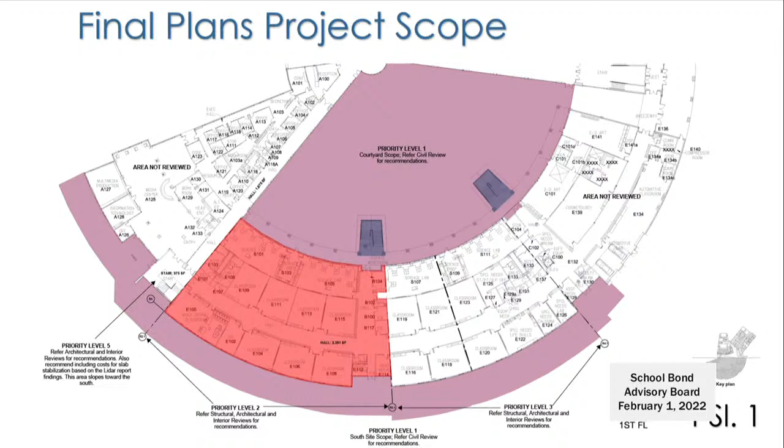The site in question is Douglass High School, which is at Martin Luther King and Northeast 10th Street. It's the south side of the school that we were having some issues with. The area in the pink color, and the purple area, are the areas we're going to be working on this coming summer.

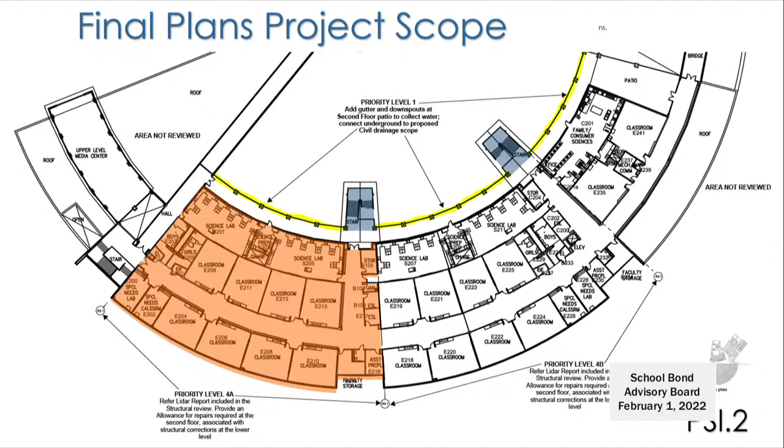The brown area now is phase one, and that's where we have the most extensive amount of settling and heaving in the slab. We have a little bit over in the part to the right. So what we're going to do is we went and did a Lidar study, where they come in with a laser and do digital measuring throughout the whole area — the floors, walls, everything — and you see the different contour lines are the different elevation changes throughout that area.

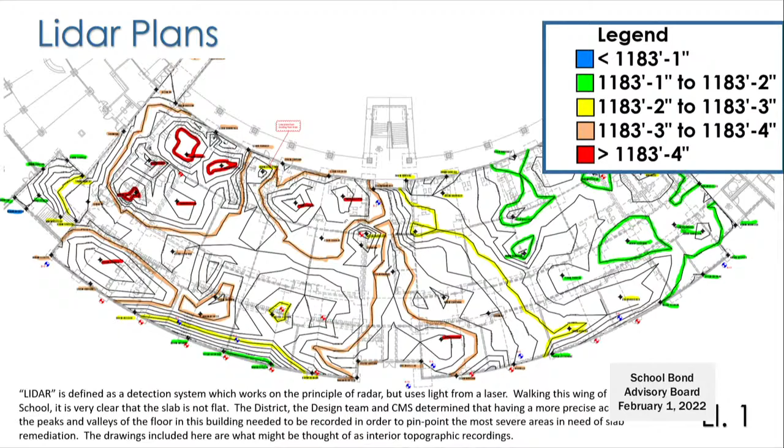This area here where the lines are real close to each other, that's where you see quite a difference of elevation in the floor. So where the green mark at the bottom is, is basically where the grade should have been. But see how the lines go up? The slab is actually heaving up at that point. So we're going to come back in — that's the second floor, with a little bit of difference in it, but not nearly like the first floor.

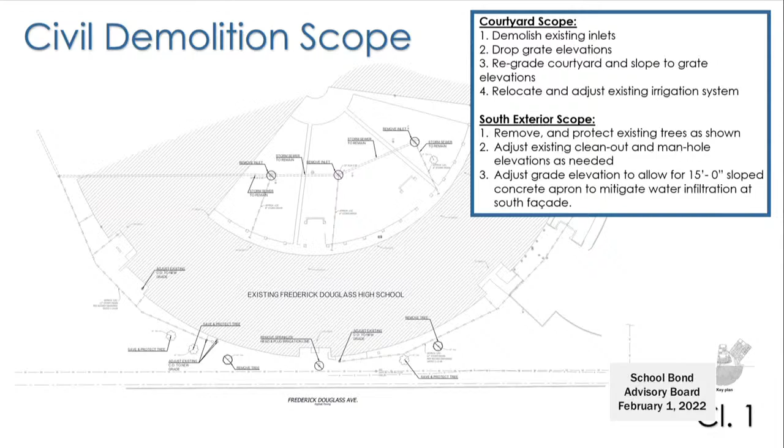So what we're going to do is demo out some trees on this south side, come into the courtyard and do some regrading, remove some inlets that we feel like are too small, and resize those up. Down here at the bottom, all the squares around the bottom part and the inner part of the courtyard is new concrete. So we're going to pour a 15-foot band of concrete around the whole south side of the school, and do a 10-foot band on the inside.

Engineers feel that the soil underneath the school originally was a real expansive clay. They dug out 4 feet of that soil when they built the school and came back with select fill that shouldn't expand as much. But their feeling is that moisture from outside rains is getting in, migrating underneath, and hitting that expansive clay deep down, pushing back up.

The outside walls aren't really pushing because there's so much weight on them. The corridor walls in the middle also carry a lot of weight. But right in the middle of that slab area, it's just 4 inches of concrete, so it's found the path of least resistance and is pushing back up.

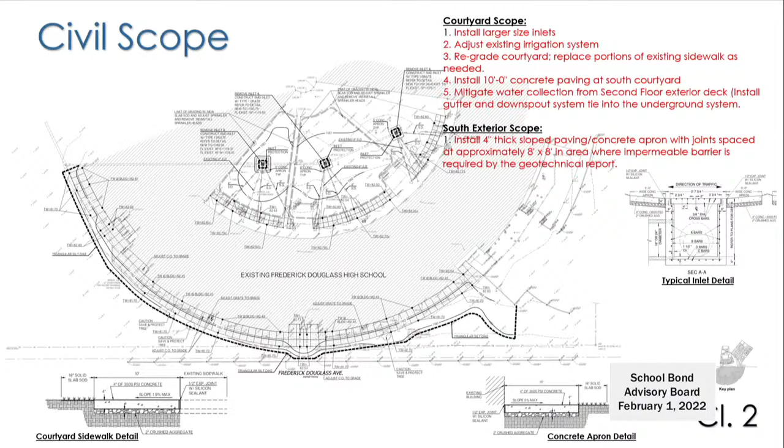So we're going to go inside the school and drill holes and do injections in the slab. We're also going to go around the outside perimeter and put in steel rods, driving them down into harder soil to hold and pull up on the outside foundation.

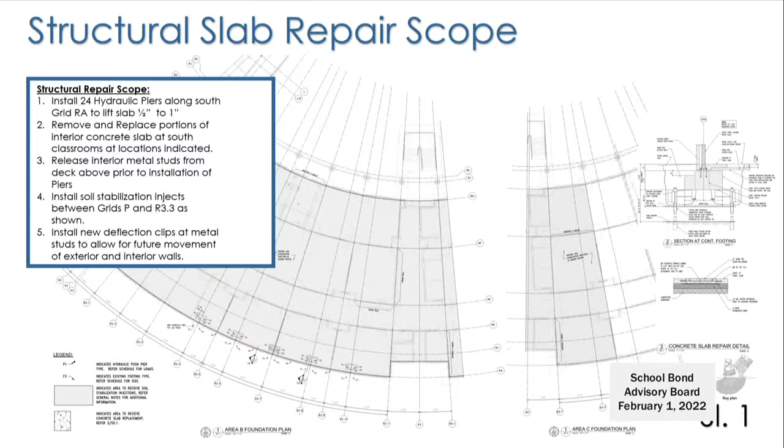We also have some stairs inside the courtyard that have failed over time, due to either a poor paint job initially or not being maintained properly later. So we're going to tear those out and redo the stairs during this project, since we'll already be in there working on the courtyard.

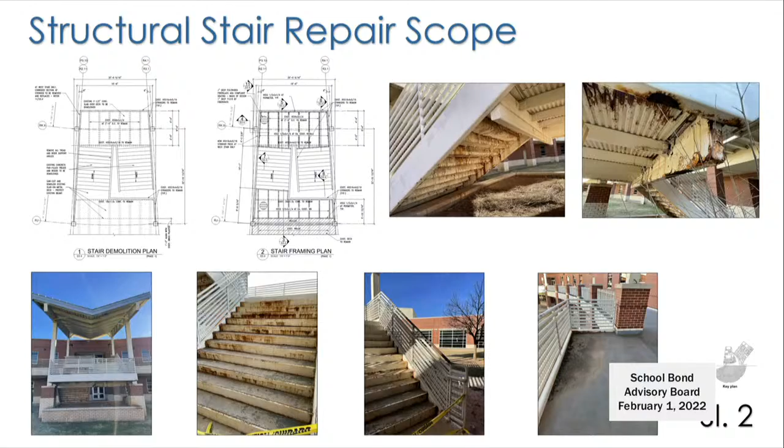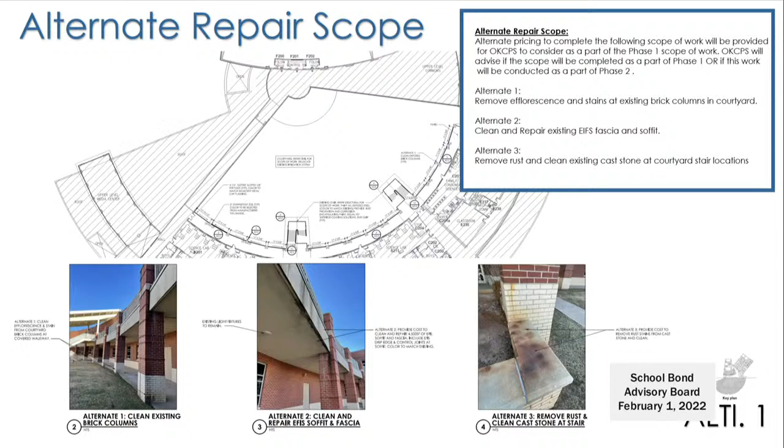We also had some alternates in the project to clean up some of the EIFS and the brickwork. If we have the budgeted money for those items, we'll do it during this project. If not, that's something we can come back and do as an alternate project later. It's not nearly as critical as the structural work.

So with that said, we're going to take care of all the structural issues this summer. We'll hold it through the next school year to see if anything's moving, then come back if everything looks good and redo the finishes inside. We have a lot of cracking issues, so we'll take out the demising walls between classrooms, rebuild them, float out the floors, and clean it all up the following summer.

And that's it — anybody have any questions on that? I have a question, or two questions. This is great, thank you.

One question: the trees you said you're going to remove, will they be replaced in the courtyard, or will there be shade put in instead? Mostly what we're removing is on the outside perimeter area. We love trees for how they look, but up close to our buildings they cause more problems than the beautification they provide, because the root systems damage our foundations. So right now we're not planning to place any trees back in that area — though we may work with Mr. McLaughlin later to get some other beautification trees placed away from our buildings. I was more concerned about shade so kids are cool when outside. It doesn't sound like the trees provide much shade though. No.

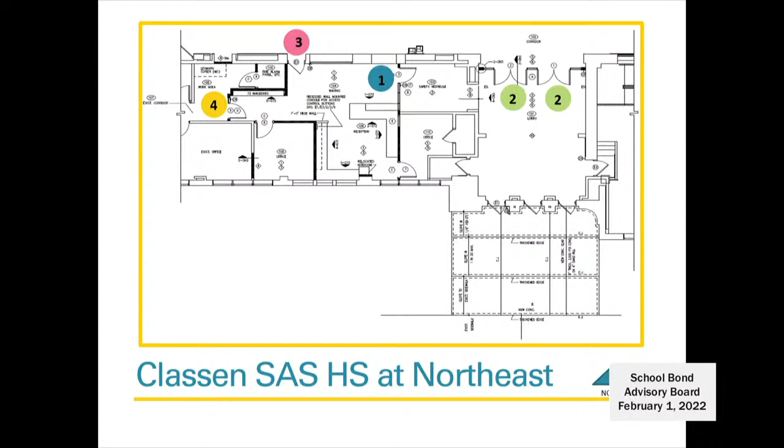Next one, Classen SAS High School. Again, you'll come in through the existing door at the bottom. Door 1 is a new storefront door we're putting into the reception area, and so on. Door 2 takes you, staff members can go on through, or door 3 takes you back in the hallway. Again, door 4, there's more offices back there, but there's another door into the corridor back there, so we're stopping people from being able to go through there.

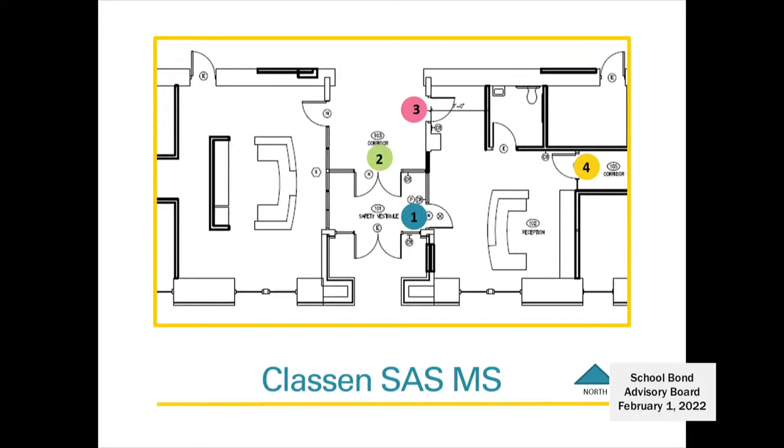And the person sitting at the reception desk at all these locations will have availability of a kiosk computer where they can give them access to that computer, or we also put in push buttons for override situations.

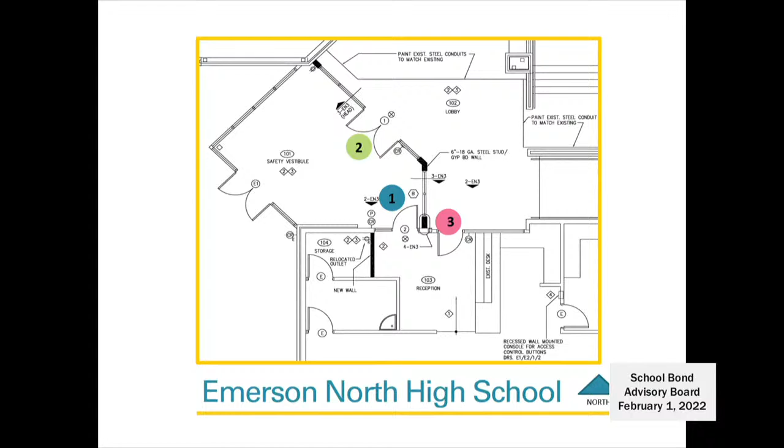Emerson North, same type of deal, existing door. We're putting that storefront in right there where door number 2 is. They'll come in, we'll add door number 1, bring them in, and then they can buzz back out door 3. There's no other doors out of that office, so that's why there's only 3 doors.

And then on that first group, there's our budgets we've scheduled for those 4 schools at $425,000.

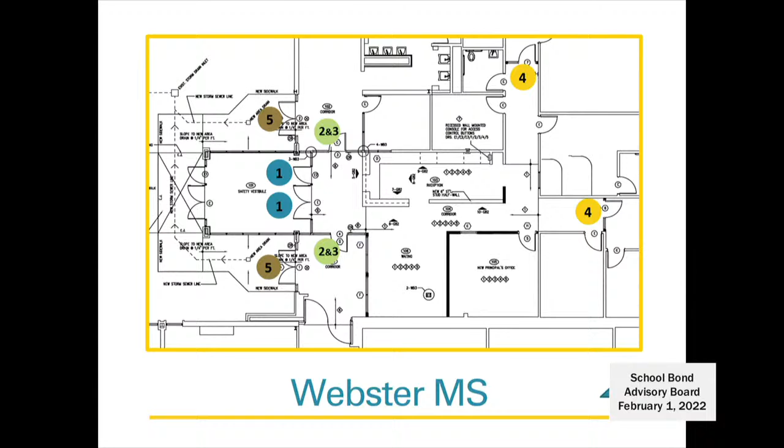Webster Middle School. This was a little bit more work because it already had a vestibule, but where the door number 1s are, those are existing doors. The office area was across a main walkway through there, so we had to figure out a way to tie that all together. So we're building a new storefront where door 2 and 3 is on both locations, and kind of reworking the office and the principal's office, redoing the reception desk in there, so that way they're all confined into one area. And we're adding doors number 5, the two 5s, to send them back outside again. That's an existing window that's there.

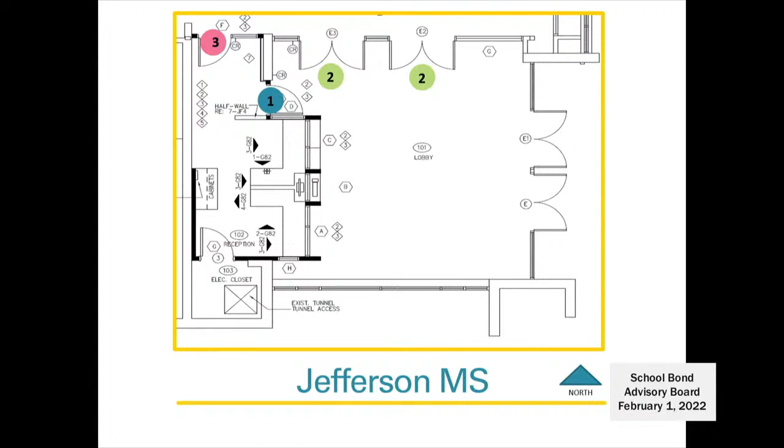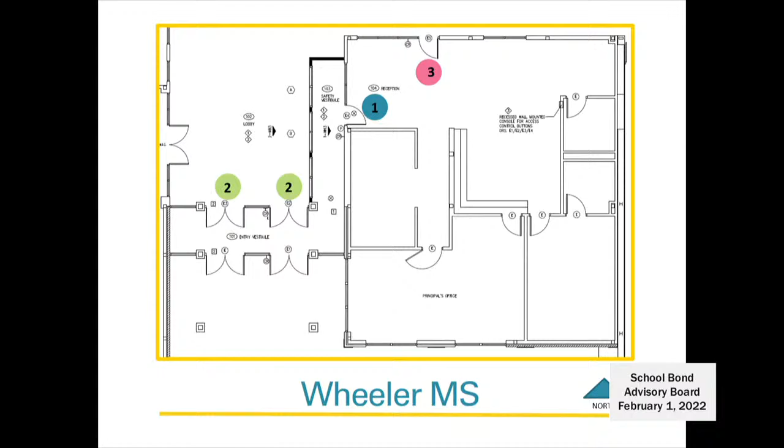Wheeler, all those doors where door 2 and E1 are, those are existing doors. We're just adding that little vestibule coming up where door number 1 is, adding hardware, and adding hardware to door number 3. And those 4 sites are budgeted at $500,000.

We'll bring them in there, new hardware, change the door out where door 2 is, different hardware, and get everybody to where they have to come to that area, then we can send them back out into the school.

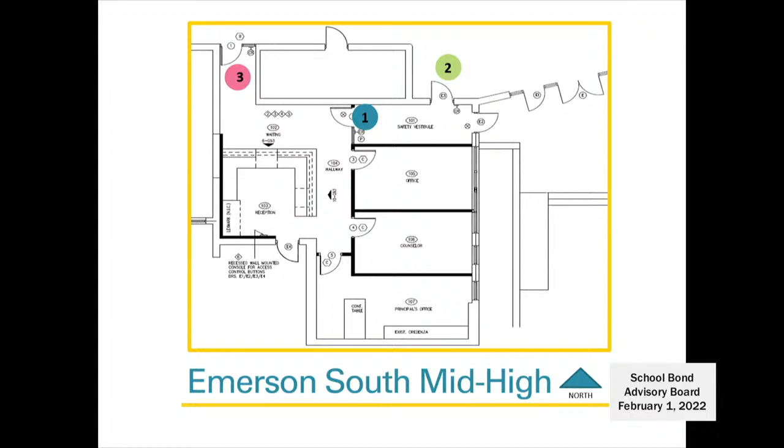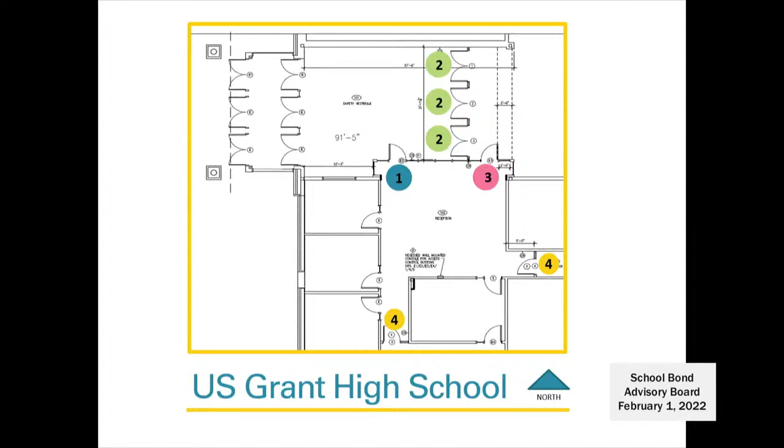We've reworked this area here where reception will be. The SRO will sit in that office there. We'll buzz them through, adding a storefront where door number 2 is. And this is where the existing office is now.

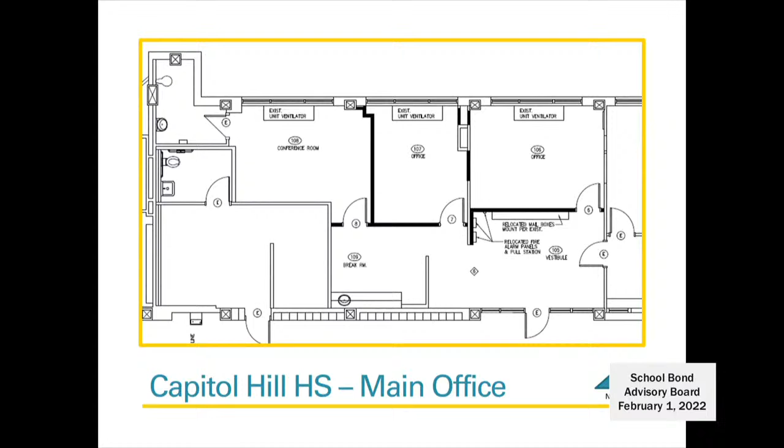So it's quite a situation - where you see the yellow line on the left, that's where the entry is. They had to walk from there all the way down here to get to the office, so there was no way to make it secure. We're going to rework this area so they can utilize that space.

Mark Twain was one of our bigger challenges. We were going to present this one to you guys last year, but we wanted to cut a hole in the wall and the structural engineer said it's a 2-story building. We don't suggest doing that on the second floor - it might be down on the first floor with them.

But literally down here at this bottom area, where 1A is, below the big blue 1, there was an existing opening at one time where the original door from the original building school was. So there's already an existing ramp on the right side.

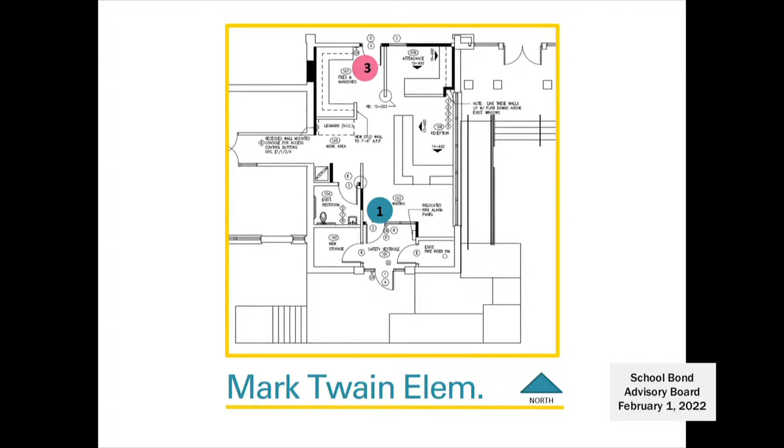All these lines down at the bottom are new ramps and landings that we're putting in. We're going to cut the old existing door in where it was before and rework that whole vestibule and office area. All those areas are budgeted at $700,000.

That will go out to bid through our purchasing department. We will submit awarded bids next month at your March meeting. Any questions?

Yes, ma'am. You did mention that there's some cameras. Can you tell us a little bit more about that?

Well, these are units about 5 inches wide and about 12 inches tall, with a camera and a microphone on it. A person comes up to it and pushes a button that buzzes somebody behind the desk. They have a little kiosk computer and can literally see them on the computer and talk to them.

And actually, if the principal is back in their office, we set that same program up there too. So if for some reason nobody's sitting at the front desk and they buzz that button, the principal can talk to them and buzz them in if they know who they are, at least into the office area. They won't be able to go any further than that, but it gives a two-way conversation.

Plus, we're putting them in the vestibules instead of at the outside door. A lot of our outside doors don't have a covered area, and you get inclement weather like we're getting ready to have the next few days. The last thing you want is somebody disgruntled sitting outside, nobody at the front desk, and they can't get inside - just getting wet and cold.

So we're at least bringing them into the vestibule, letting them be in a nice, dry, warm area. If somebody's not there, it gives them time to come up and let them in. Thank you, it's really good.

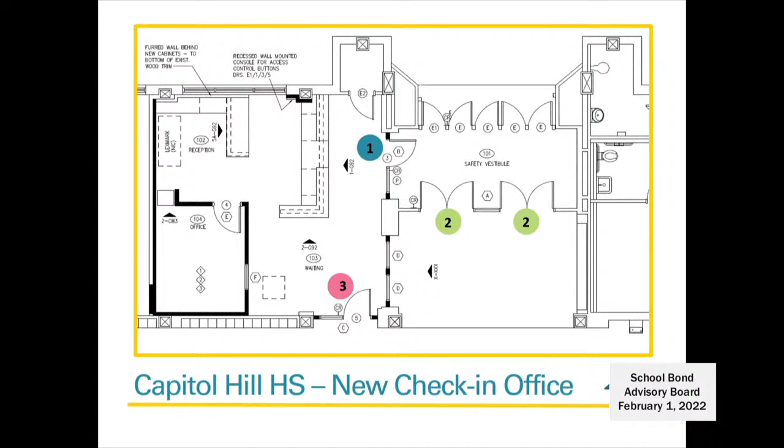Even if kids come into the front doors, like this existing setup at Capitol Hill, they won't come through there, they'll just come straight through. There's 5 doors outside, 4 doors inside, and they'll continue to come right on in. Then when school starts, they lock the second set of doors down, and after that they have to go to the office.

And if somebody's not sitting right there at that counter, at least they're inside. But if somebody comes in or buzzes the buzzer, someone will have it on their computer too, so they'll be able to come up and know that they're there.

Great. The second part of my question is about the other end of that, people visiting the school when the system is fully in place. Are there wayfindings, signage, in both the parking lot and at the door, so visitors know where to go to follow this process?

We're not changing any of the main entrances except for Mark Twain, which is the only one we're going to change, and we will have some type of signage there. Where you walk up to the front door, there's a handicap ramp with a landing, and it continues up to the front door, where you'll see the new door anyway.

As someone who visits lots of these schools, I know I don't always remember exactly what to do, and they get a little irritated. So I think the more signage you have, the better, to be welcoming to visitors and folks.